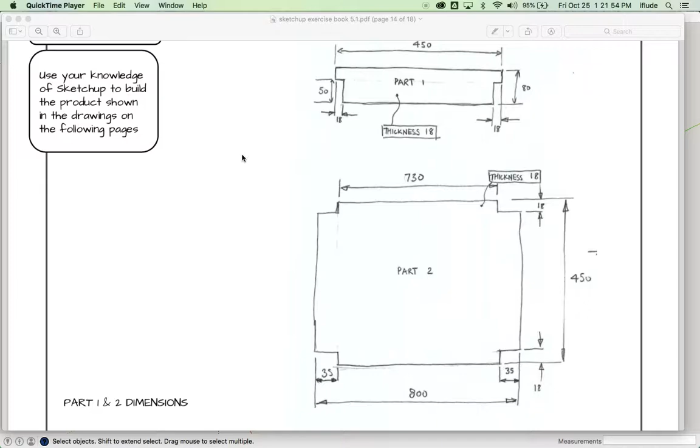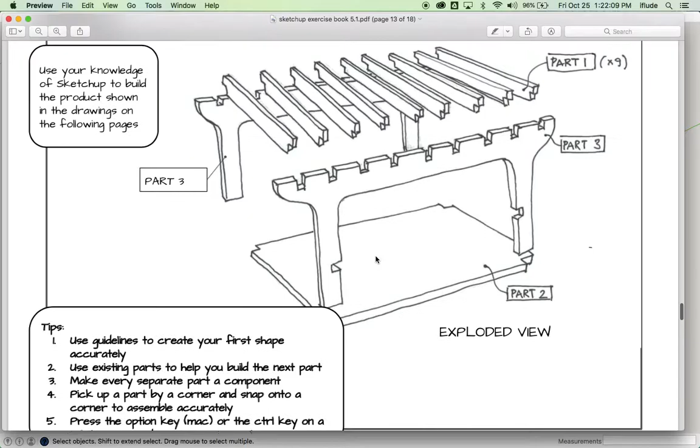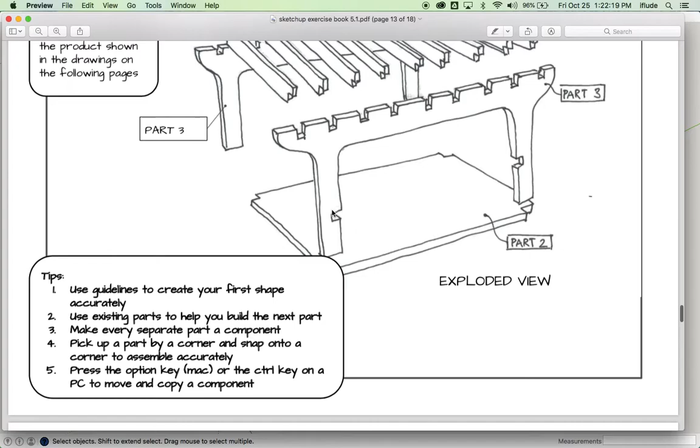The sharp-eyed among you will have noticed that there's a detail missing from my drawing. If we go back to the booklet, you'll see in the assembled view there's a little shelf below to put magazines on, and there are also some slots in the legs of my table which need to be made to make that fit in.

Okay, so let's have a quick look at what our dimensions need to be. We can see there's a distance of 102 to the bottom of the slot and a distance of 120 to the top of the slot, which means the slot is 18 wide. The slot goes in by 35.

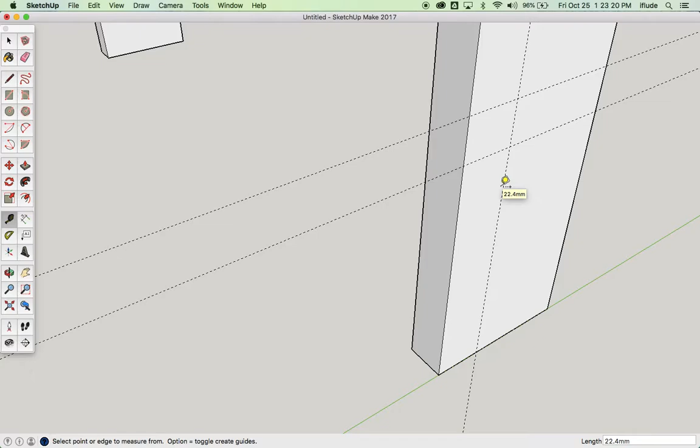So I'm going to use my guidelines again in SketchUp to create that. Take the tape measure tool, drag up by 102, and then drag up by 18 to create 120 at the top, and then we need a distance in from the side of 35. If I go over to my other leg, I've already got my horizontal lines because they go on forever pretty much. So all I need to do is drag in and type 35 to get it in exactly the right spot. Now I can really easily do these slots.

Now there's two ways actually of doing this in SketchUp.

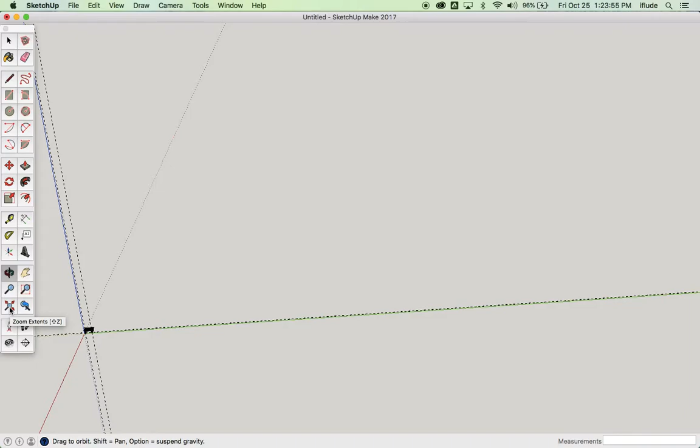What happened there? Okay, well here's an interesting thing to learn. There was a little glitch in SketchUp, and suddenly I'm miles and miles away from my model. Now if that happens to you, rather than trying to zoom in and zoom in, you can hit this button called Zoom Extents, and it takes you right back to where you were. So let's get back to where we were.

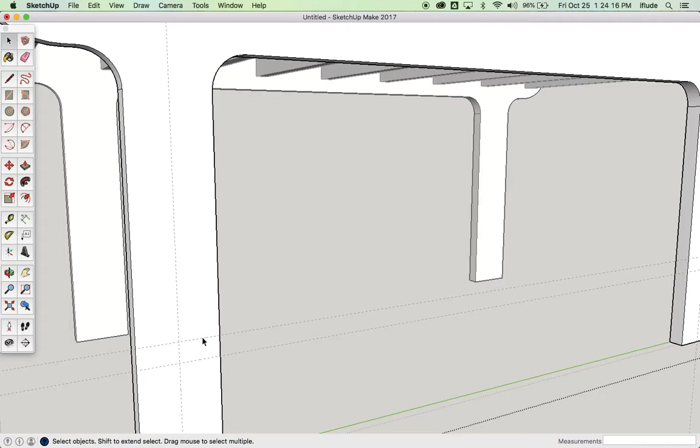There are two ways of making these slots, and I'm going to show you them both. The first thing I need to do is double click, so I'm editing this table leg, and taking my pencil tool, the first way is to draw from here to here and then to here, which enables me to use the push-pull tool to create my slot.

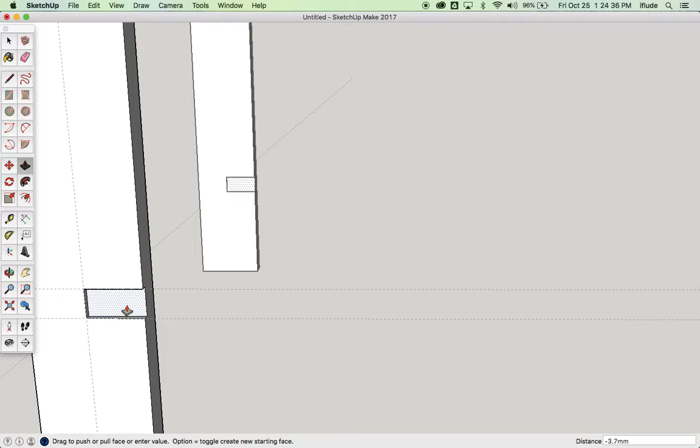You'll notice when using the push-pull tool that if you go all the way through, you'll see a strange effect where two surfaces try to occupy the same space. That's when you know that if you click, it will cancel out and disappear. Okay, so that's your first way of doing it.

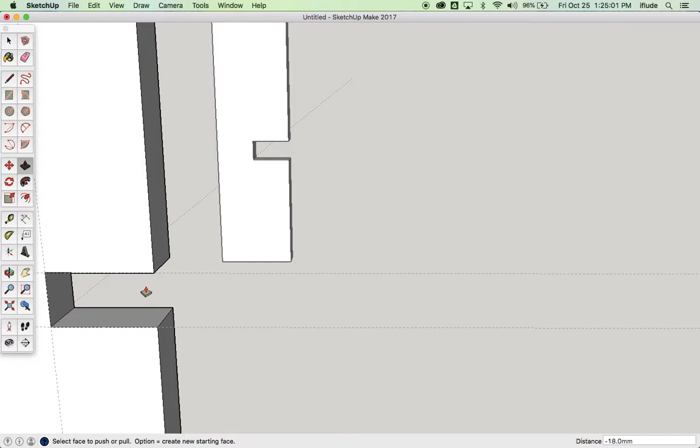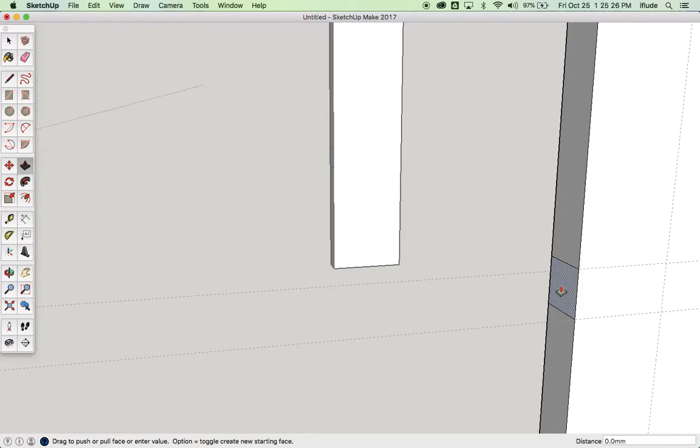The other way to do it is in the perpendicular direction. Let me show you what I mean. I'm going to go over to this side, and from that intersection, draw a line across. And instead of going in sideways, I can go in lengthways and snap onto that guideline, which makes sure I'm exactly at 35.

Now either way is fine, you get the same result. And actually in SketchUp, it's kind of a nice thing that you've got two different ways, or more, of achieving the same result.

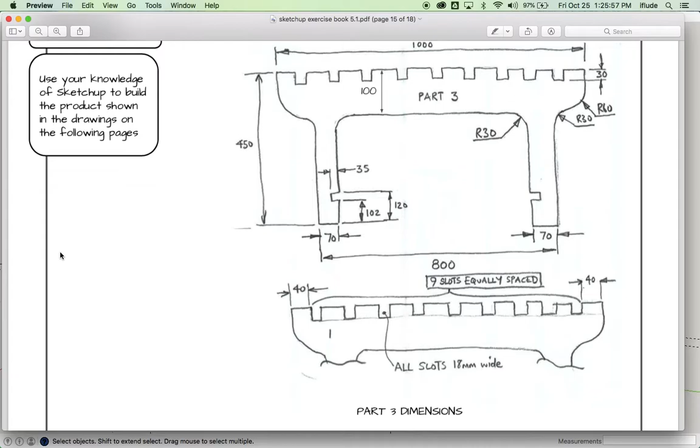Now the final thing we need to do is draw the shelf at the bottom. You can see the length of the shelf is 800, exactly the same as the distance between the outside of the legs. And the width of the shelf is 450, exactly the distance from the outside of this leg to the outside of that leg.

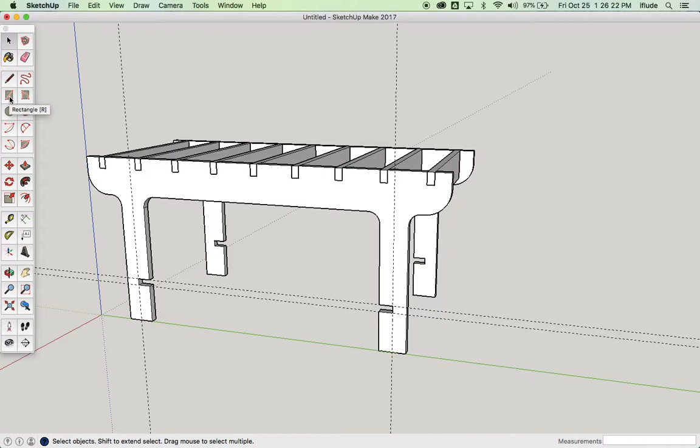So here's a real easy way of doing it. Please excuse the noises of my cat in the background. I'm using this point here to draw my first point, and I'm dragging across to the diagonally opposite point.

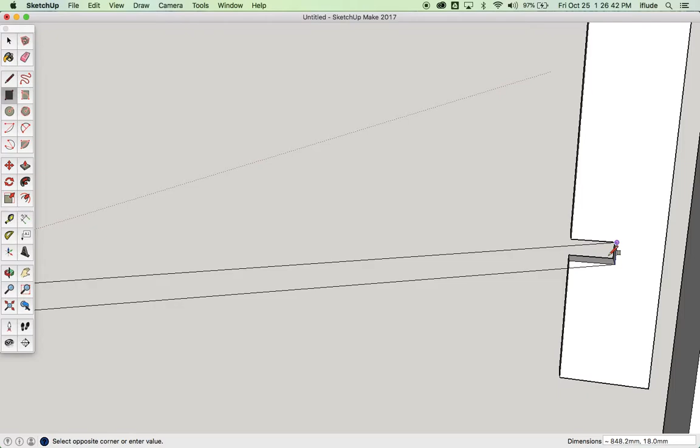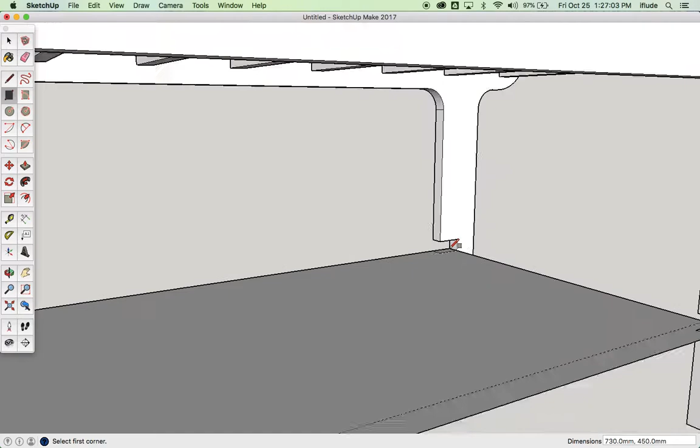Now the problem is I can't see it really well here. Actually I can see it pretty well, but even better if I go to my rotate or orbit tool. And if I go back to my rectangle tool, it remembers where I was and allows me to continue creating that rectangle, which I think is an awesome feature of SketchUp. So you can change your view and then go back and finish drawing an object.

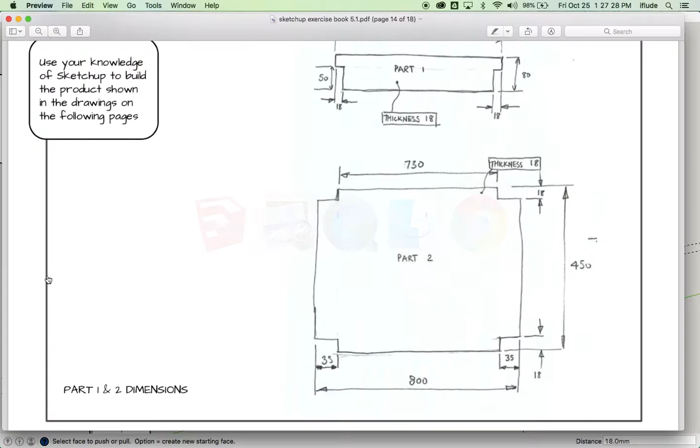Now I can use what I've already drawn to push-pull this up to 18, which is the size it needs to be. However, that isn't the end of the story, because we also have these little end pieces that stick out, which we haven't yet drawn. So we need to go back and finish that off.

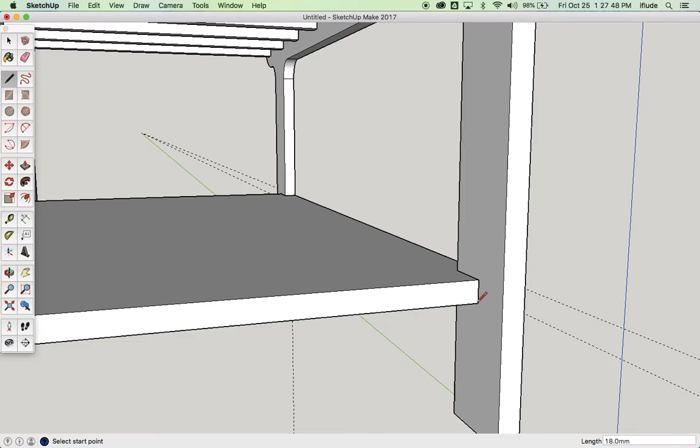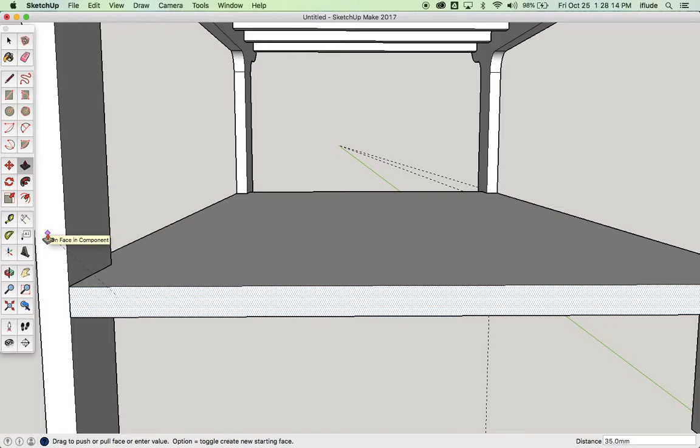That's super easy because I've already drawn all the geometry I need to draw this in the right place. Take my pencil tool and from that point to that point, draw a line. This is very similar to the way we made the cross members. From that point to that point, draw a line, and then we push-pull. Because this distance here is 35, we can just push-pull it to there, touching this surface, which guarantees the surface is aligned with it.

Do the same thing on the opposite end. Line from there to there, and line from there to there. And use my push-pull tool to pull it, touching this surface to make sure it lines up.

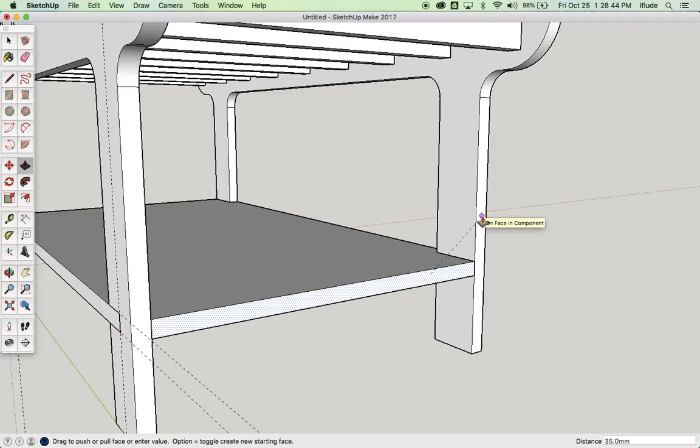And I think, other than making that into a component, which of course I always need to do, I think I'm good. Now, just in case you don't believe that what I did there is correct, I'm going to move it so you can see the details of the shape.

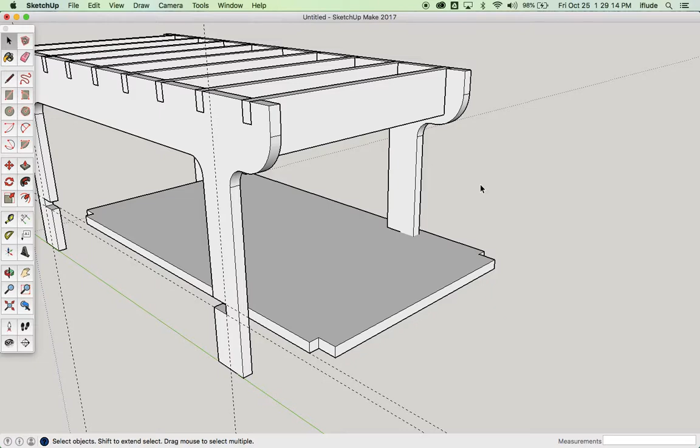Our product is finished. So let me get rid of these guidelines just to neaten things up a little bit. And there we have the finished product.